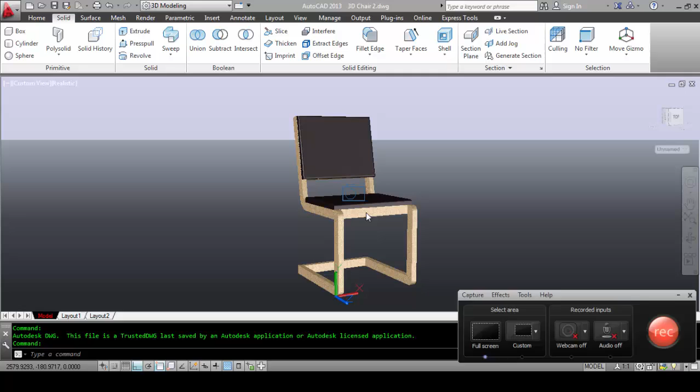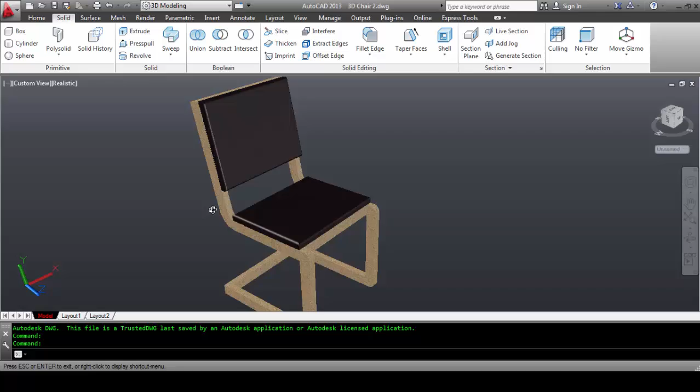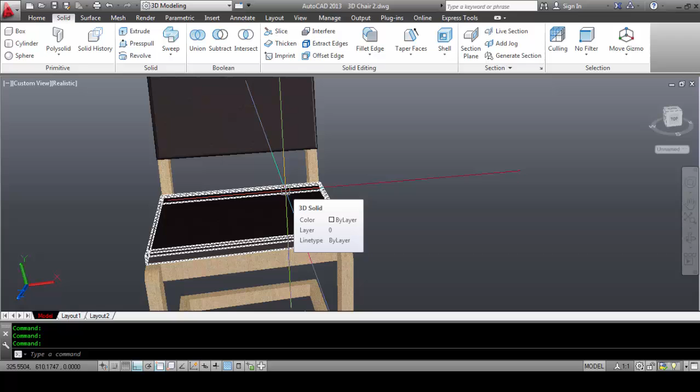I'm Arvin. Today I'm going to show you how to make this 3D chair in AutoCAD using all the commands available, and applying materials to it. This is basically what we're going to achieve after the tutorial, and at the end, I'm going to show you how to render this object in AutoCAD.

Okay, so let's start. Open and let's go to home. I always turn off my grid, I don't like it appearing. And type UN and I change it to millimeter, it's the unit I'm using. And let's start.

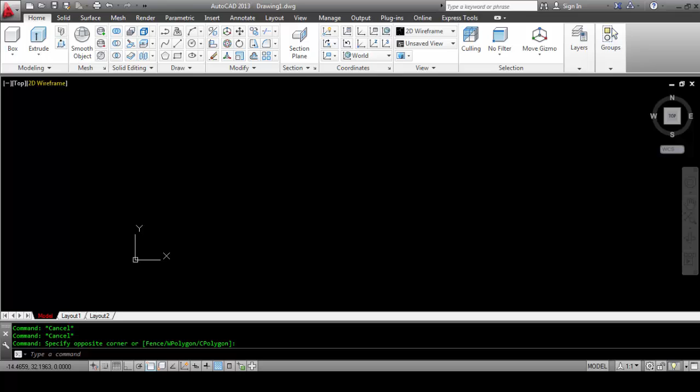First, we're gonna use this view control. Most of our drawing, we're gonna use this, it's gonna be very useful to us. So let's use left and start.

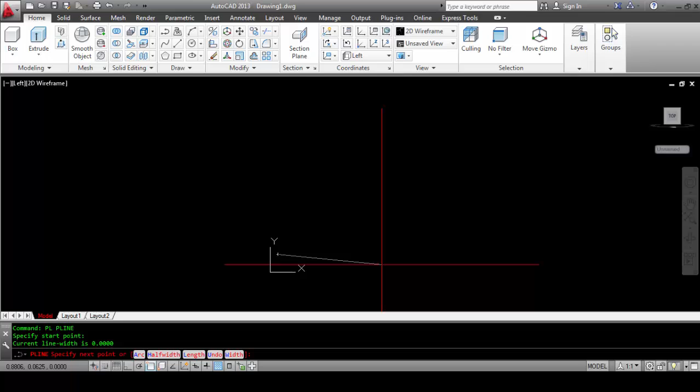Start with a polyline and turn on ortho, F8 shortcut key. And type 550.

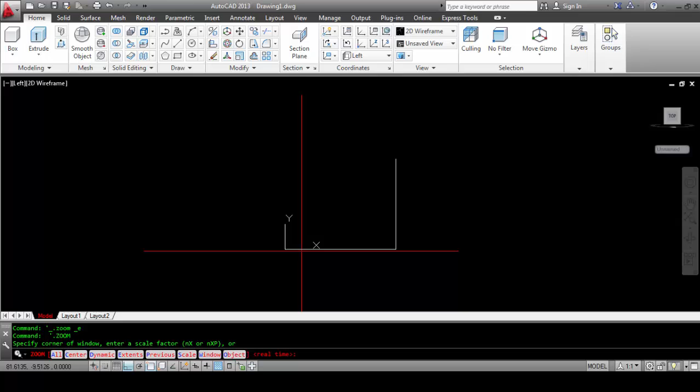And our polyline, 45, I mean 450. I forgot to turn off my snap, it's not working. Use this endpoint. Type 950.

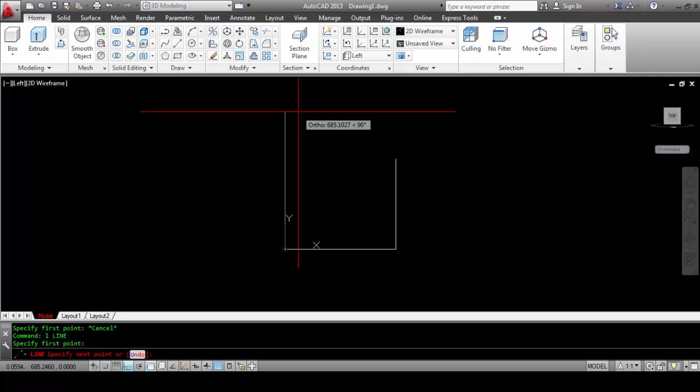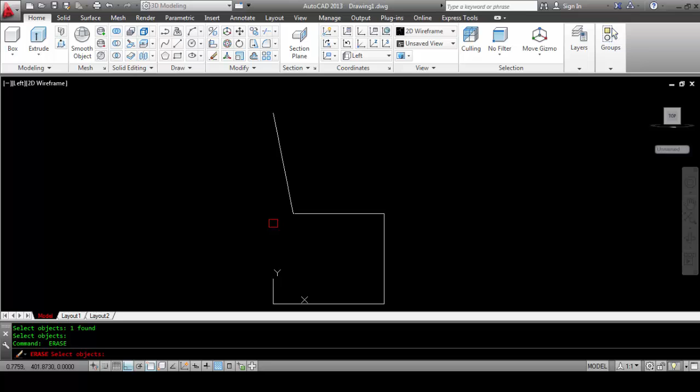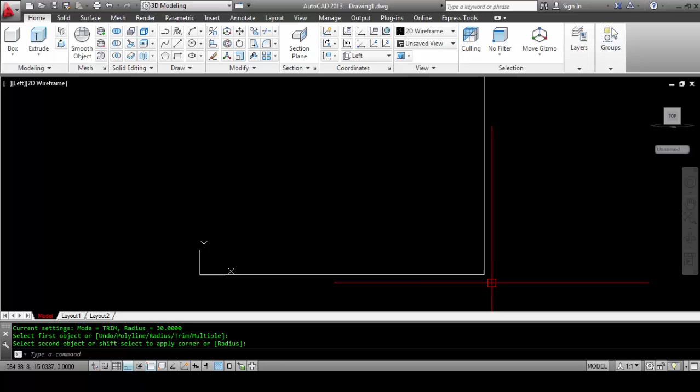Here, gonna make a line 450. And erase this. And press F for fillet, with a radius of about 30.

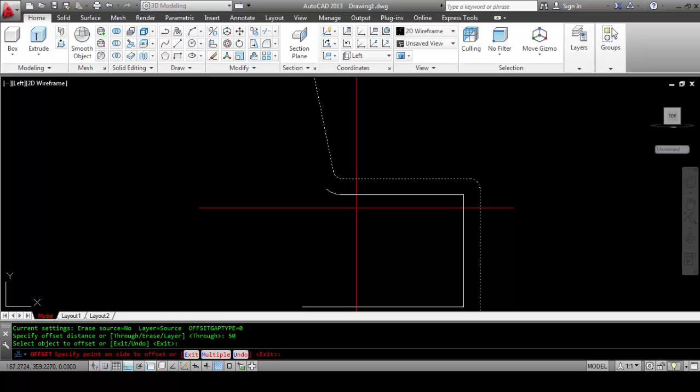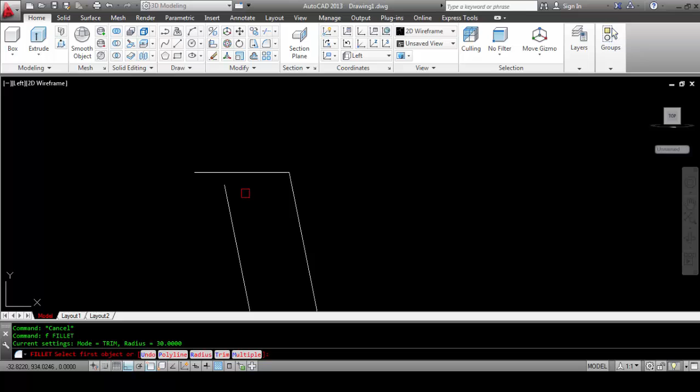Fillet these edges. After that, let's join this into one object and offset 50 inward, they're not here, but you're gonna put it in this direction, and put a line. This fillet, R and 0, so we're not gonna apply any radius to that.

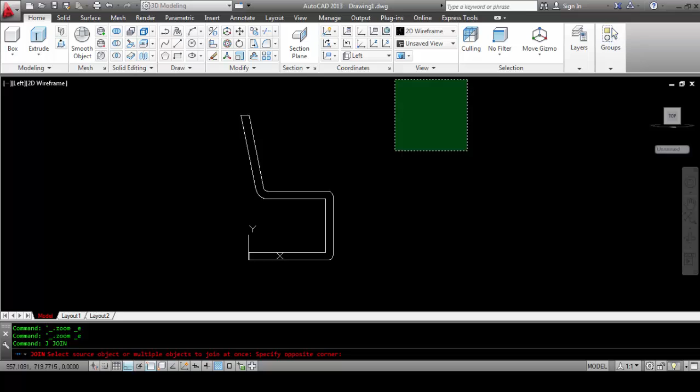If you double click on the middle mouse, you can zoom out this. And another join object, select this, press enter. It's now one object.

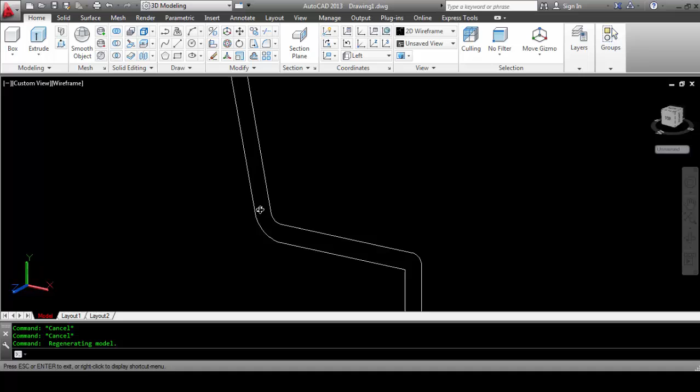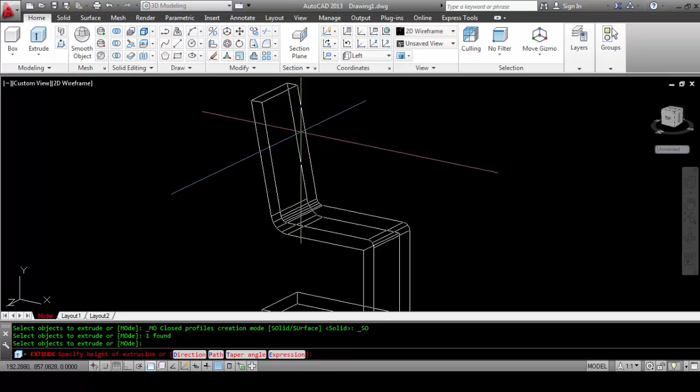And if you press shift and middle mouse, you can now orbit in the drawing. Now we're gonna apply extrude or push pull, up to you. Enter, and type 30.

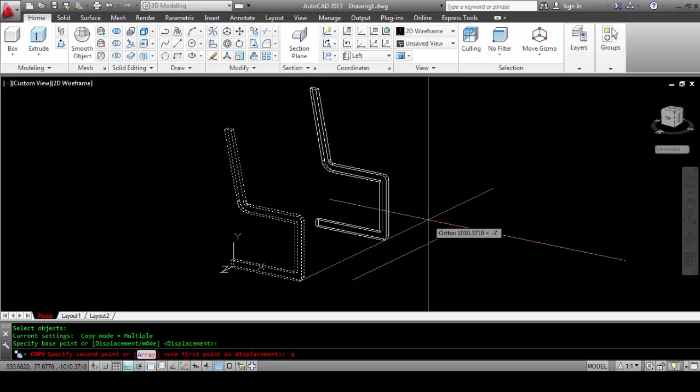I'm gonna copy that, CP shortcut key. Our distance would be 450. We have now our legs.

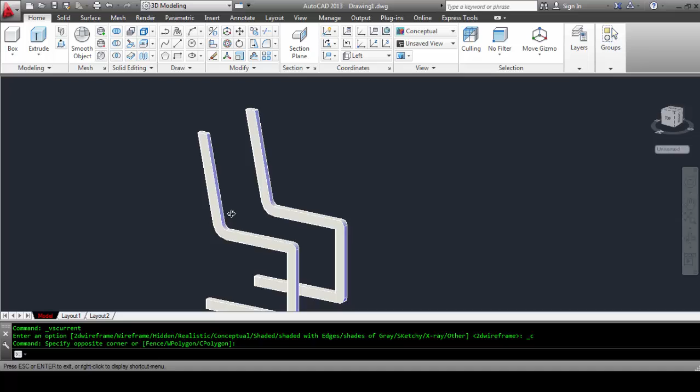And change it into wireframe, conceptual. And you can see now a gray, light gray. And let's put it in top view.

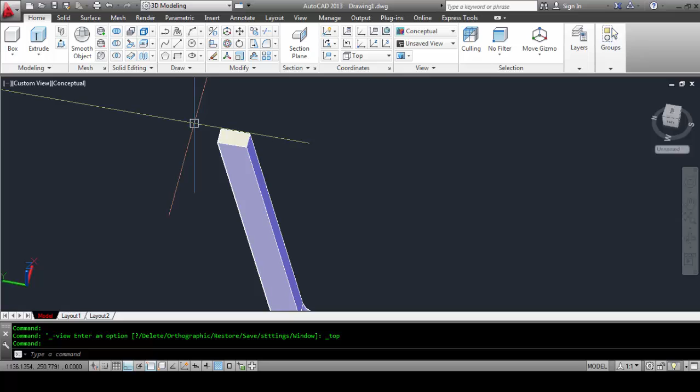And we're gonna draw, made a mistake, back to left, and we're gonna draw another frame here. Turn off ortho, F8, and 30.

Copy the line that you made, way to the right, and another line in the top, and the bottom. And we're gonna join this object again.

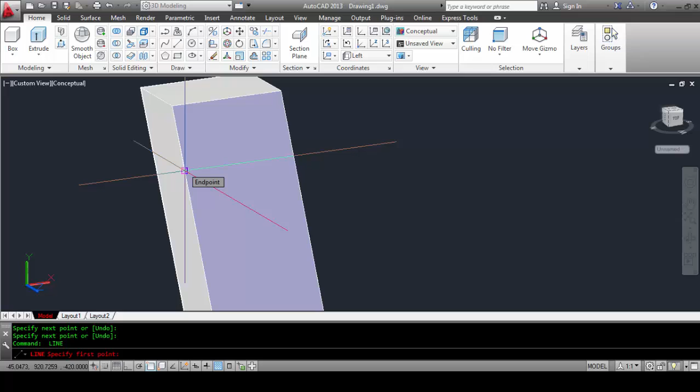Now we're gonna extrude it to the right. Okay, and we're gonna copy somewhere here.

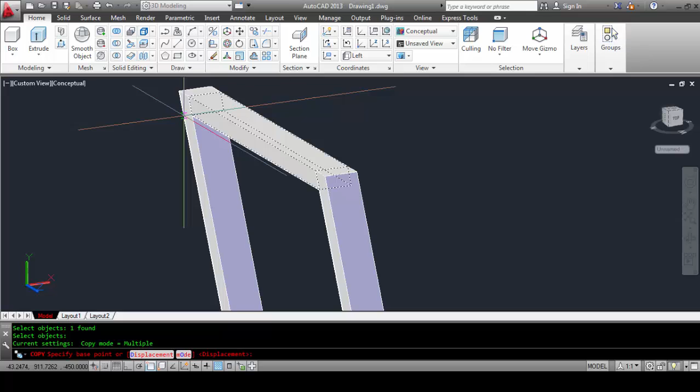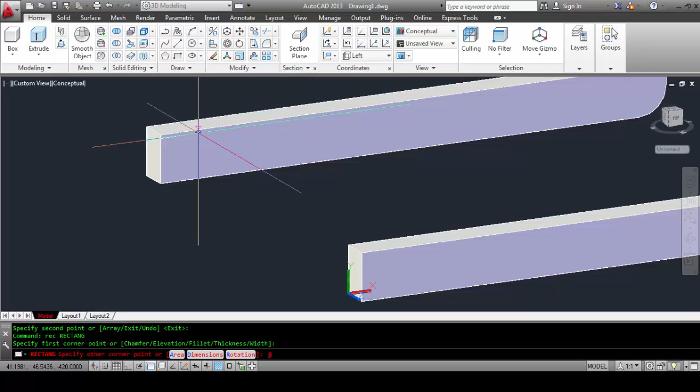We're gonna make another object. You can type rectangle command and at 30, comma 50. And extrude again, select your object and extrude.

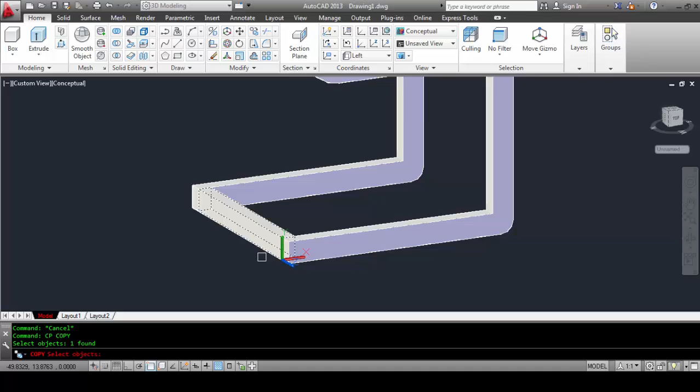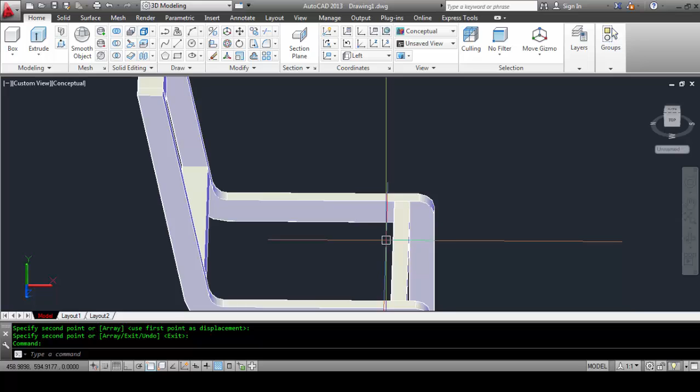Copy this here. You can rotate this. Now copy it here. Okay, I'm gonna copy it, CP, and this is my base point, and copy there.

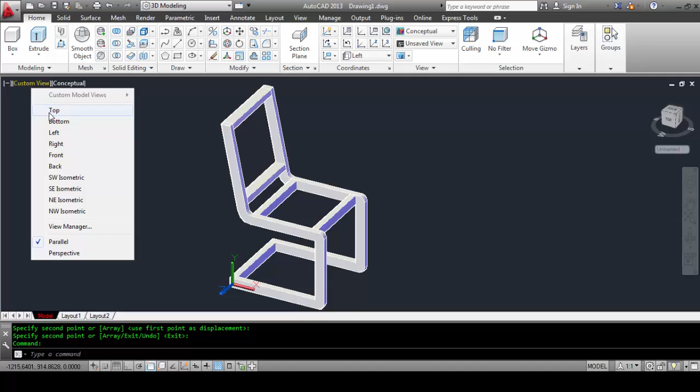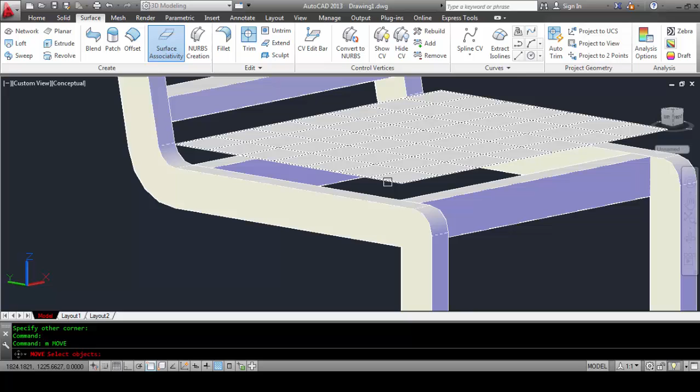Now back to top, and go to surface, use this planar surface, and there. We make it so it's not sticking, we're gonna move it below, and we're gonna extrude this.

Back to home, extrude 30, and apply a fillet command. Choose this fillet edge, and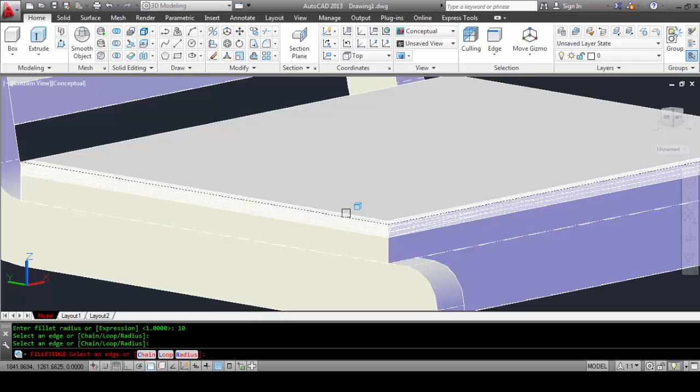type it again, fillet edge, radius 10, there, right there, here and here. Press enter twice, and there we have our home, whatever.

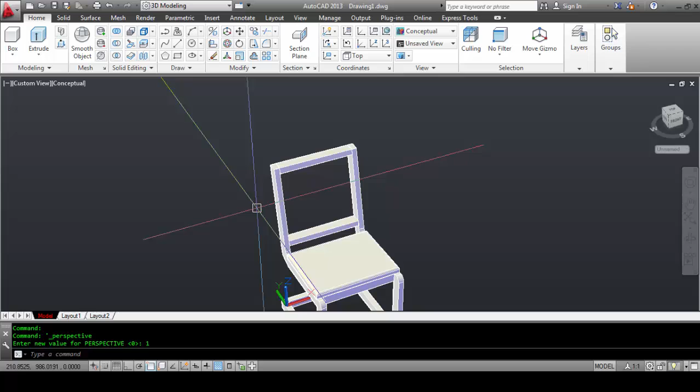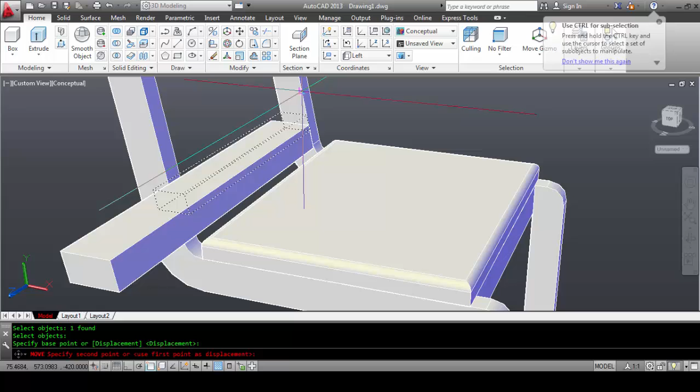We can change this into perspective. I moved this too much. Go to left again, and you can now move this top. Move this. This will be my base point, then move it here.

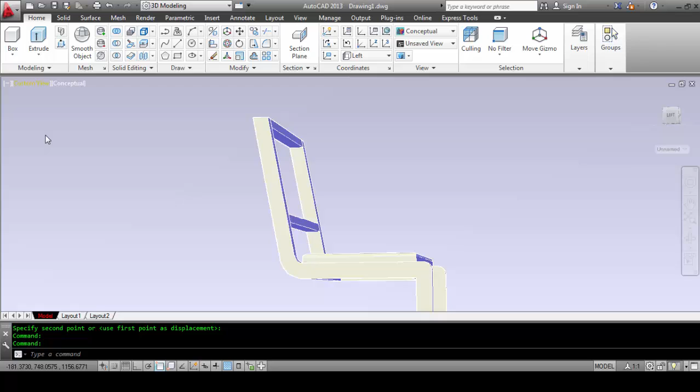Now we're using the left projection. So now we're gonna make here something, we're gonna make a rectangle here. Press ortho, 30.

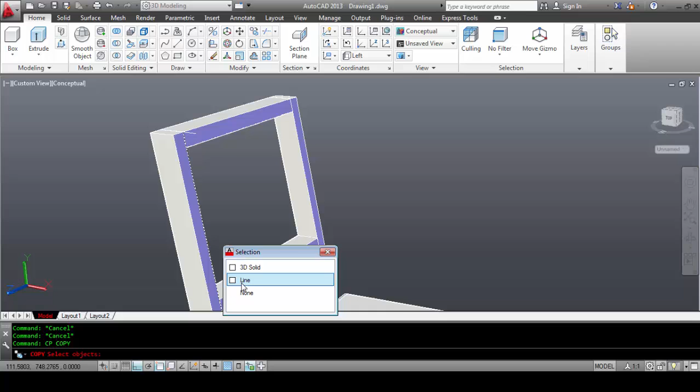Copy your line again, you can press select cycle and press copy. Select your line, use my base point, there. Copy, make another line here.

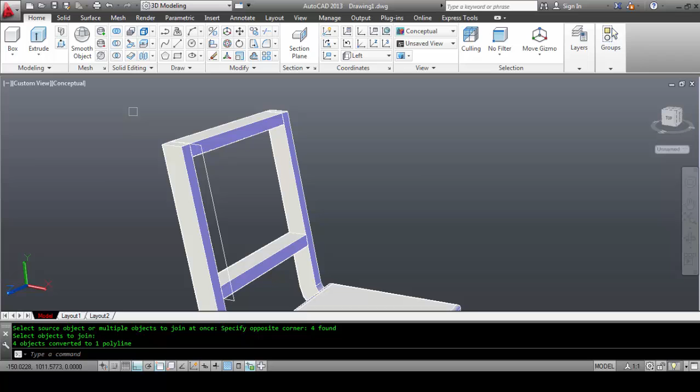And then we're gonna join them again. And before we extrude, we're going to move it left and extrude.

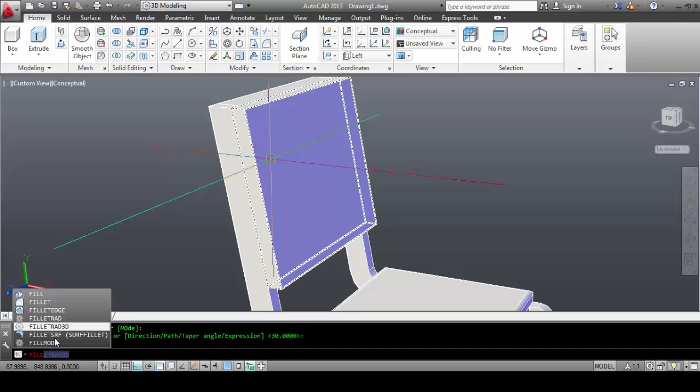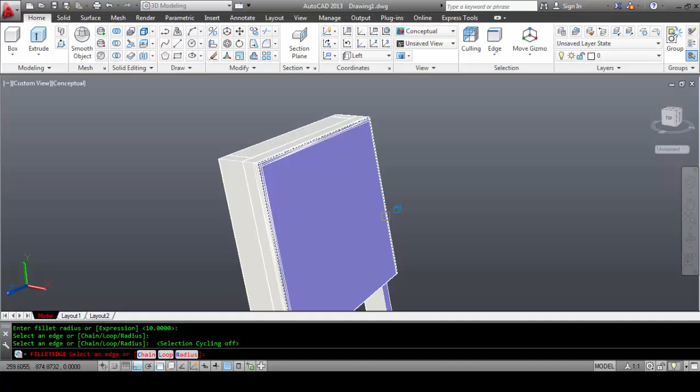And apply a fillet edge again, fillet edge here. And I forgot the radius, the radius is 10, leave it 10. And you can turn off select cycle. Here, here, here, just enter twice. And there.

We have finished our 3D chair. Now we're gonna apply some material. Change it to realistic, and matte, MAT.

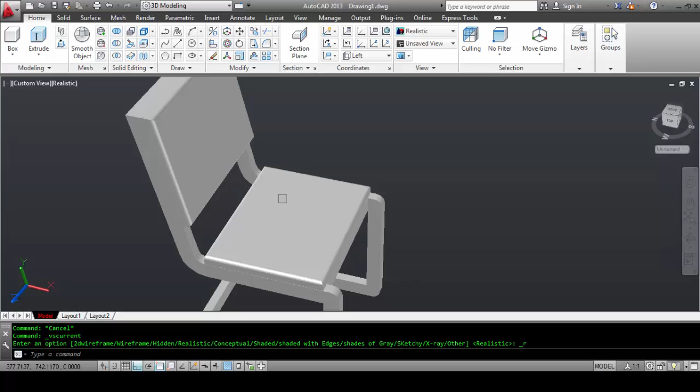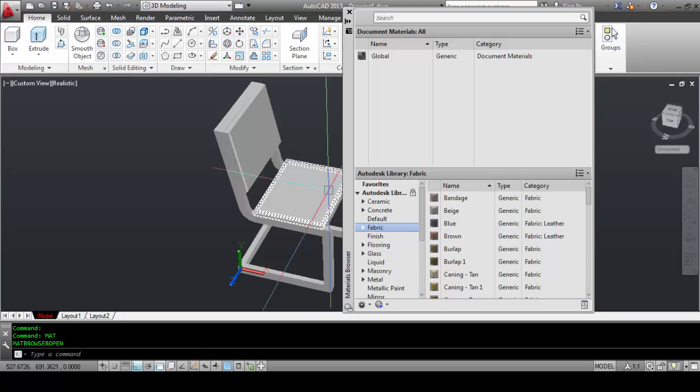Oh, my PC is slow. So here, material tab will appear, you can choose here from the Autodesk library. We'll choose wood and pick something I like. You can pick anything you want, but I'll choose maybe this yellow polish. Then you just have to drag.

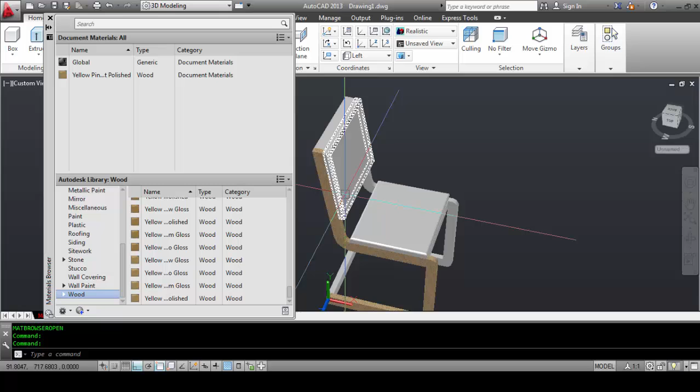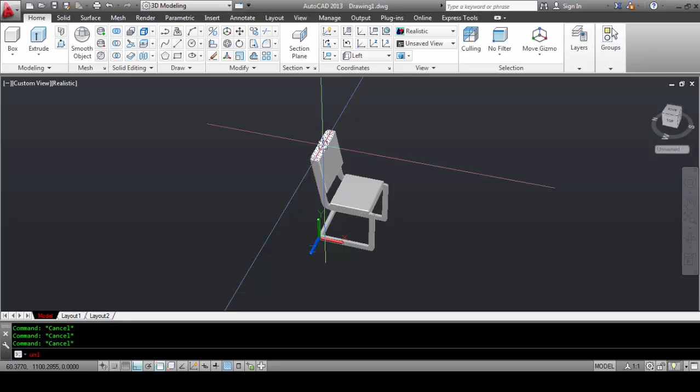Oh, before that, I forgot to union, or use the union command, join all the legs. Select and press shift and select this and this, press enter. And okay, back to that.

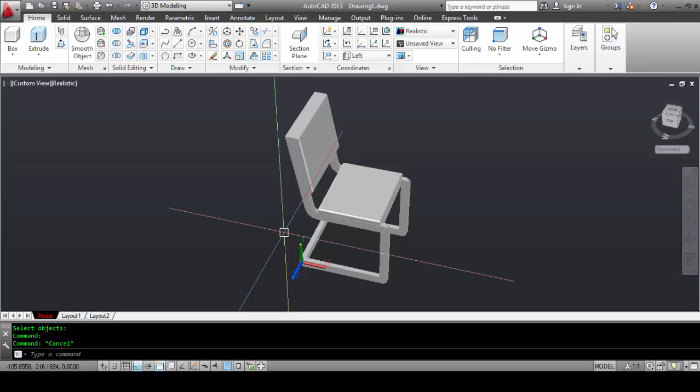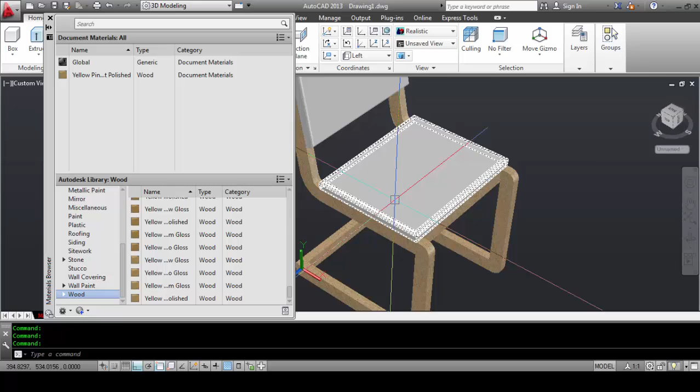Here I choose this. Okay, it's applied directly to the object. And for the foam, bright fabric and something dark, maybe velvet.

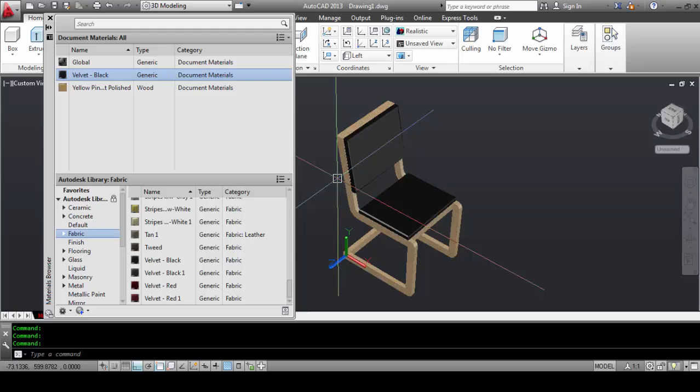Velvet's fine. So there we have it, our 3D chair is finished, and you can also render that.

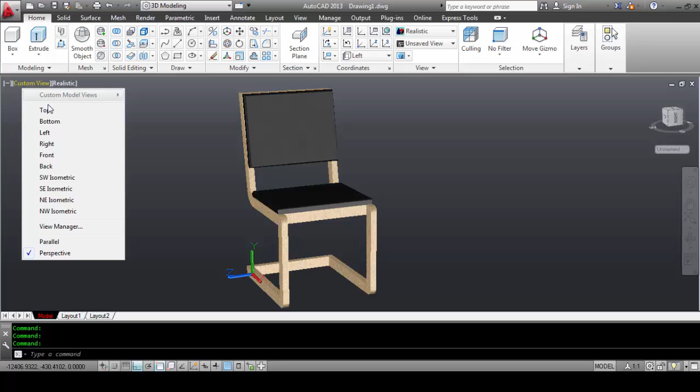Go to top and apply cam, and let you choose where. Press enter. There, go to front.

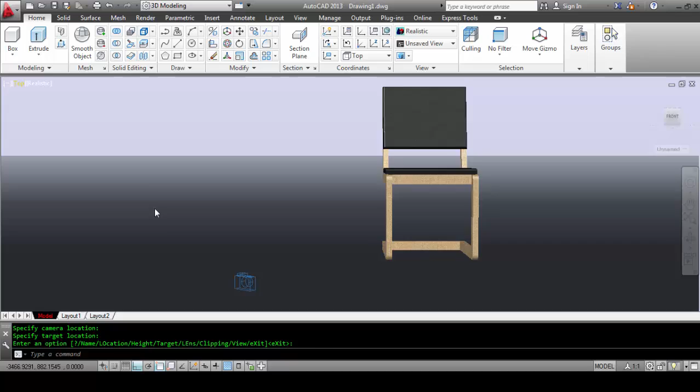I'm gonna move it to the top. You also click this, you'll see a preview. Change it realistic.

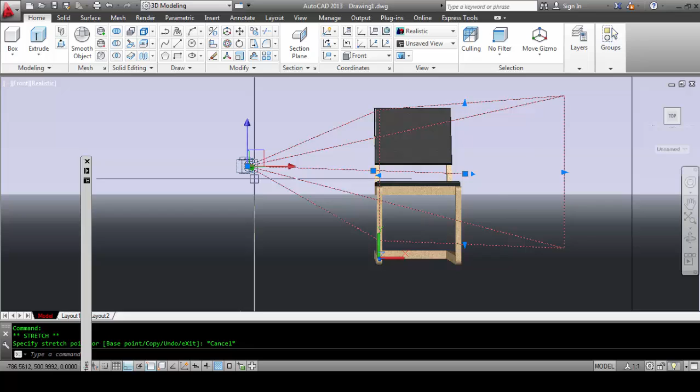You can type PR, properties, this camera, and in the field of view you can change it to something higher, 50, and maybe move this a little bit lower.

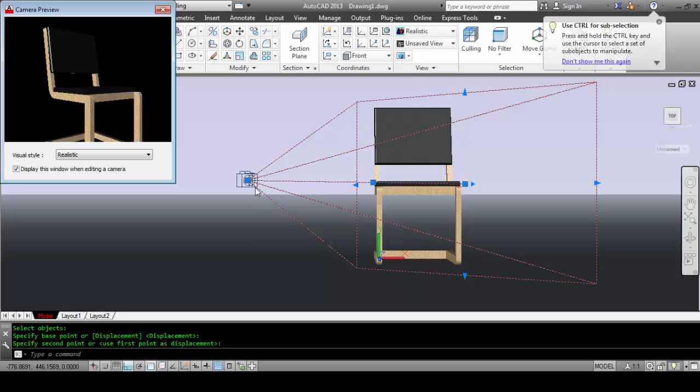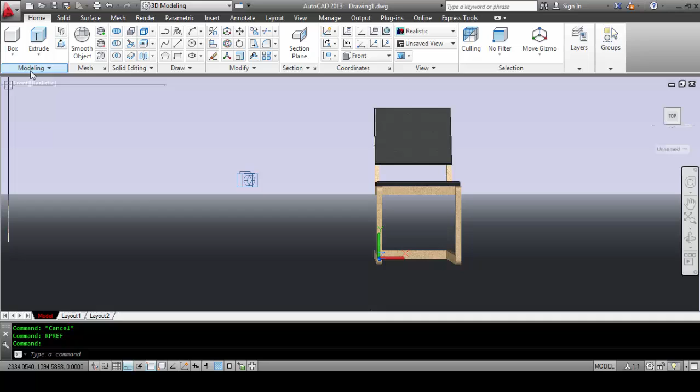And before we render that, type RPREF for render settings, and we're going to change this, maybe high, and okay, this front, change it to your cam 1. Okay, try to render.

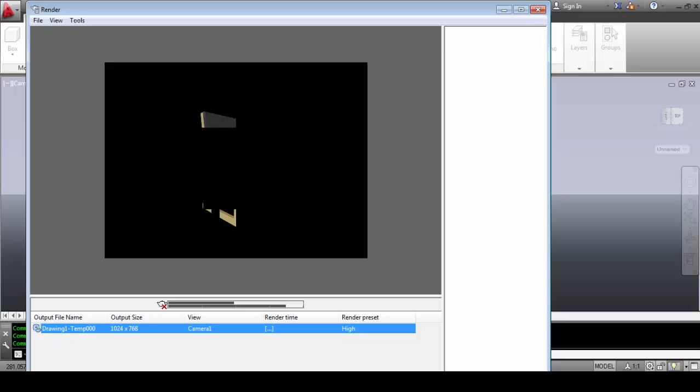There you have it. You now have the rendered version of your drawing, and you can click this to save it in the format you want, JPEG or anything, name it 3D chair.